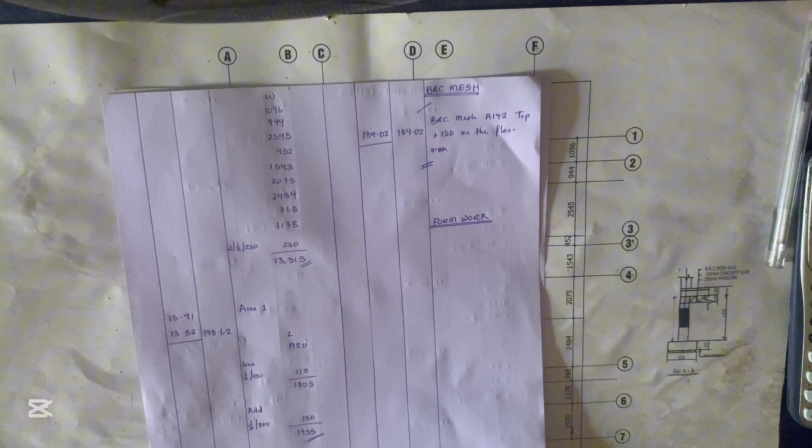In today's video, we're going to be treating how to measure for the formwork and the oversight concrete to this particular drawing for our frame structure. So first things first, how do we measure for our formwork?

Now, I have explained this before that formwork based on the standard method of measurement can be measured in two ways, either in linear meters or in square meters. It is measured in linear meters if the width of the formwork is less than 300 mm, and it is measured in meters square if the width of the formwork is greater than 300 mm. I don't know if that makes sense. So now, we measure it in linear meters because look at it in this situation.

Now, I want to ask you a question. When you are constructing the formwork for your oversight concrete, what kind of formwork or what kind of material do they use? Do they use marine board or plank? They use plank.

Now, the reason why we measure the formwork for oversight concrete in linear meters is because of procurement. When you want to go and get your plank for the construction of the oversight concrete, you will notice that they buy the plank per length. I don't know if that makes sense. The plank is bought per length.

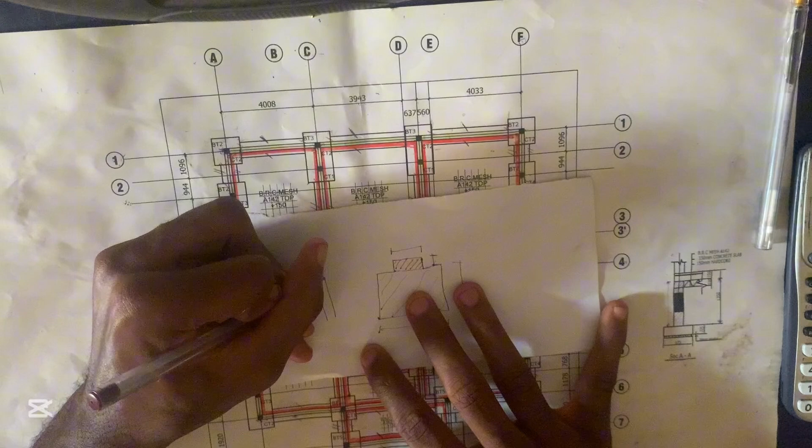So now we deviated too much. Let's go back into our calculation. In order to calculate for our formwork, what do we do? The formwork is going to be nailed at the external side of the block. For example, if this is a section of our block work, the formwork is going to be laid like this. This shaded portion here is our formwork, and it's going to go round the building.

So the same thing applies here. The formwork is going to be laid at the external side of the block work. I don't know if that makes sense. So it means that the formwork is going to be laid like this externally.

And back. So that's how the formwork is going to be laid. So what we're going to be doing now is getting the individual length of this irregular shape. We're going to be finding the out-to-out dimension for this length. We'll measure the out-to-out dimension for this length, multiply it by 2 because here and here are the same. We're going to get the out-to-out dimension for this length, out-to-out dimension for this length,

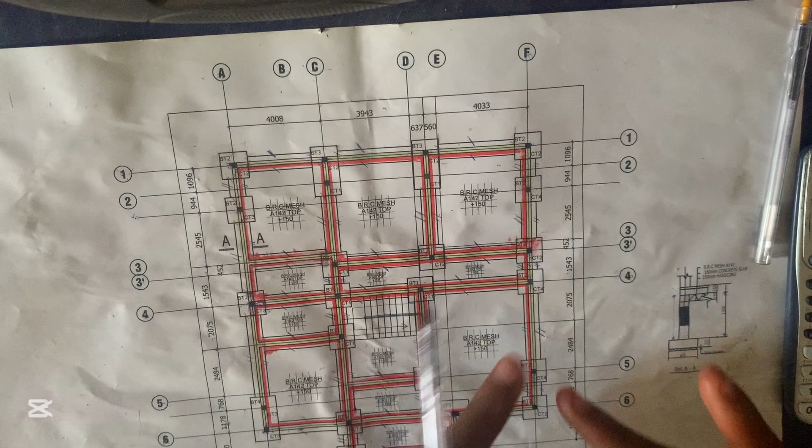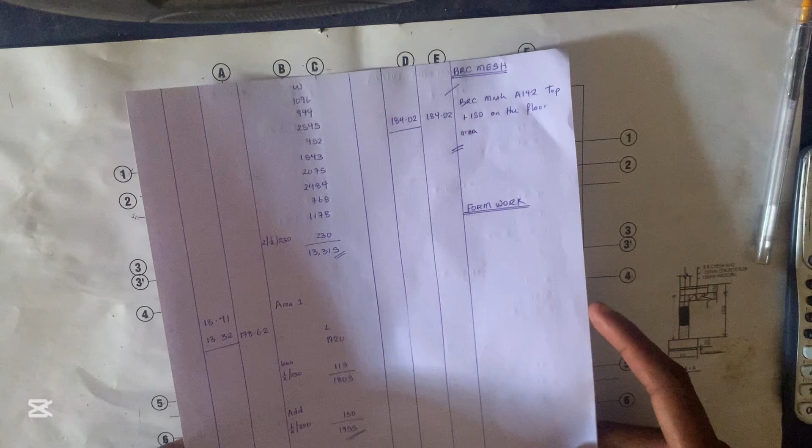and out-to-out dimension for this side. That will give us the total length or the total perimeter of formwork for this building. I don't know if that makes sense. So with that, we'll now begin our calculations. We're not going to do any rigorous calculation here because we've already done most of the calculations when we were dealing with our damp-proof membrane.

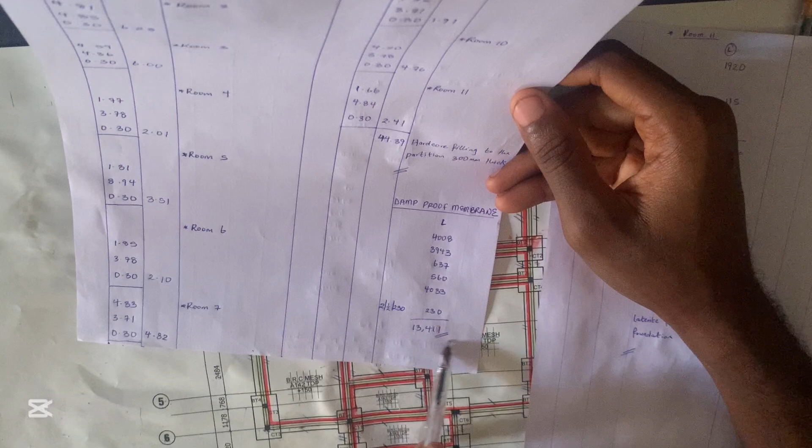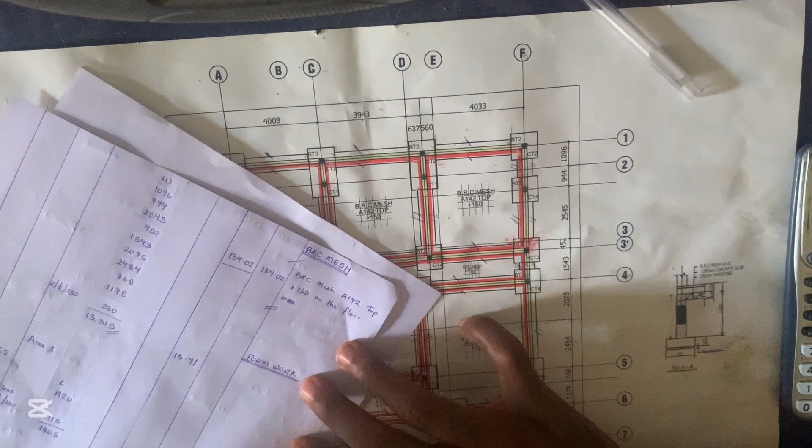So now, if you look at this, we got the total length for this side here as 13,411, as you can see here. We've already calculated it when we calculated for our damp-proof membrane. So all we're going to be doing now is bringing this length back, because this 13,411 is the out-to-out dimension from this point here down towards this point. So the first side will be this long side here, which is 13.41, and then we'll close.

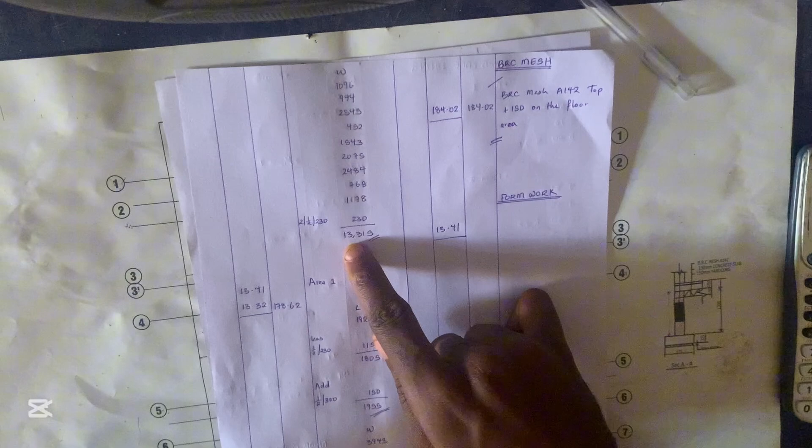So the next part will be this side and this side. For the width side, we've already calculated it as 13,315. So we're going to be bringing it back, meaning that from this edge down to this edge is 13,315. So we'll just record it: 13.32, and then we'll close, and then we'll multiply it by 2.

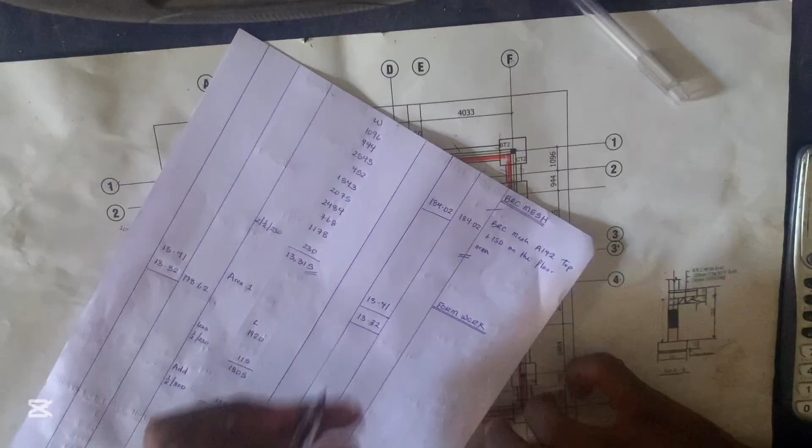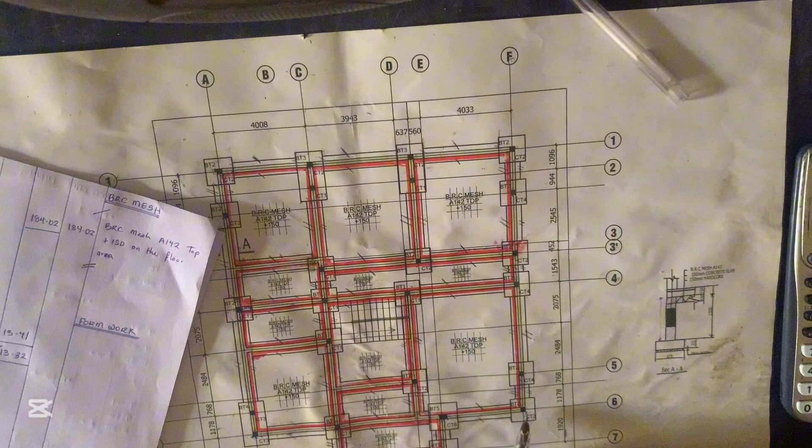We're multiplying it by 2 because here and here will be the same. I don't know if that makes sense. What we have here is the same thing as what we have here, right? So now we're not going to be looking for this side and this side. We're going to be looking for this side to this side, and this side to this side. So the next side we're going to be looking for now will be from this edge down towards this edge.

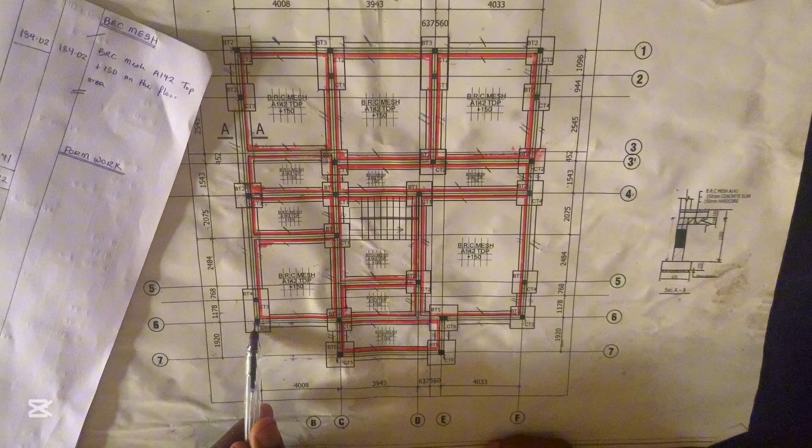But if you look at this, we've been given our center to center dimension from callout A down to callout C. So what we're going to be doing now is subtracting half the thickness of this blockwork to get to this edge, and then adding half the thickness of this blockwork to get to this edge. I don't know if that makes sense. So 4,008 minus half of 230, and we'll add half of 230 to this side.

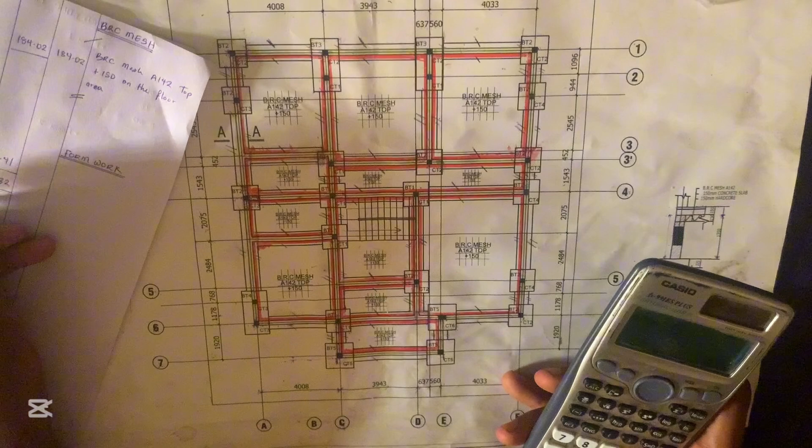So 4,008 minus half of 230 becomes 3,893. So it means that from this edge down towards this edge is 3,893. Then we add half of 230, which is 115, and we have 4,008. So it means that from this edge down to this edge is 4,008. So we're going to be booking 4.01, and then we'll close.

Similarly, we're going to be doing the same thing for this side, using the same approach. Since from callout E to F is 4,033, we're going to be subtracting half the thickness of this blockwork to get to the edge of the blockwork, and then adding half the thickness of this blockwork to get to this other edge.

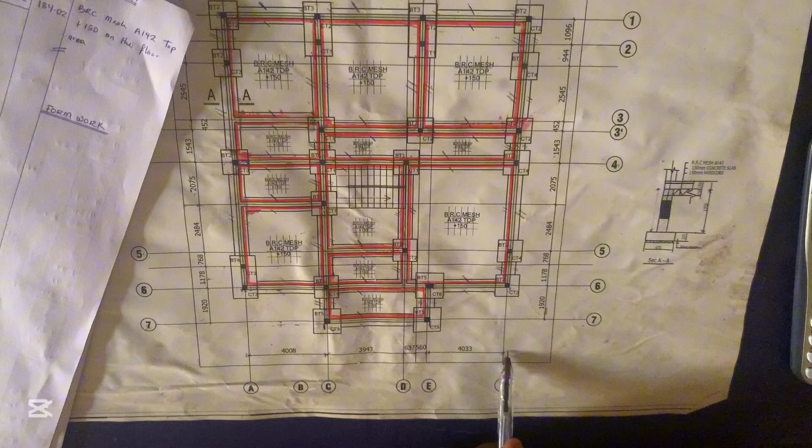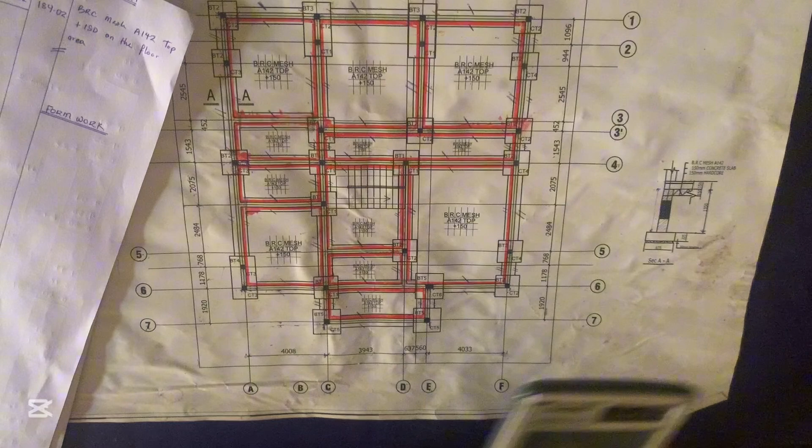So 4,033 minus half of 230, which is 115, is equal to 3,918. So it means that from this edge down towards callout F is 3,918. Then I'm adding half the thickness of this blockwork, which is 115, and I'm having 4,033, which is 4.03, and then we'll close.

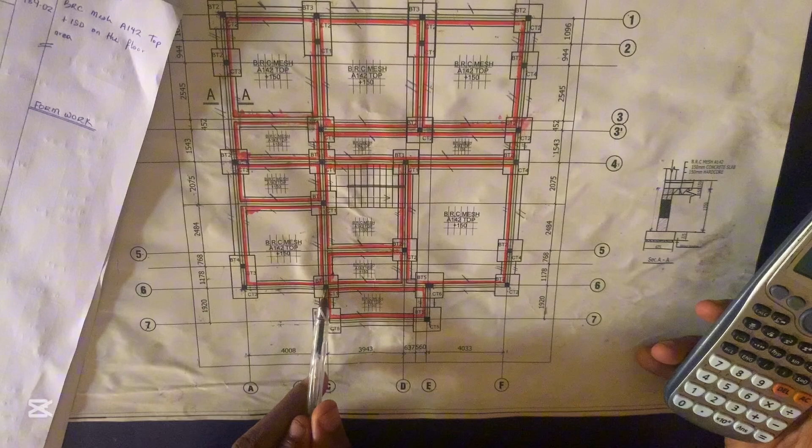So we have gotten this side and we have gotten this side. So the last thing we're going to be getting now is this long side here. And we've already measured that when we were doing our DPM. And as you can see, we've calculated it as

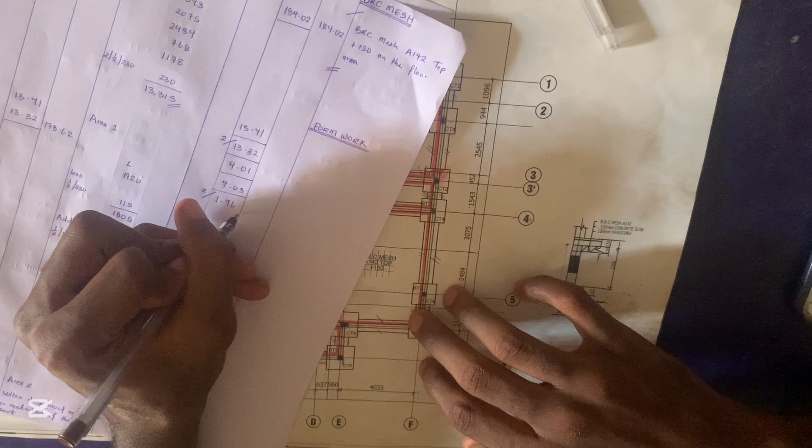1.955. So it means that this side here is 1.955 and this side here is 1.955. So we'll be multiplying it by what? 2. So we'll now measure 1.96 multiplied by what? 2, and then we'll now close. So what we're going to be doing now is bringing this out to our squaring column, and then we'll add everything together to get the total length of our formwork.

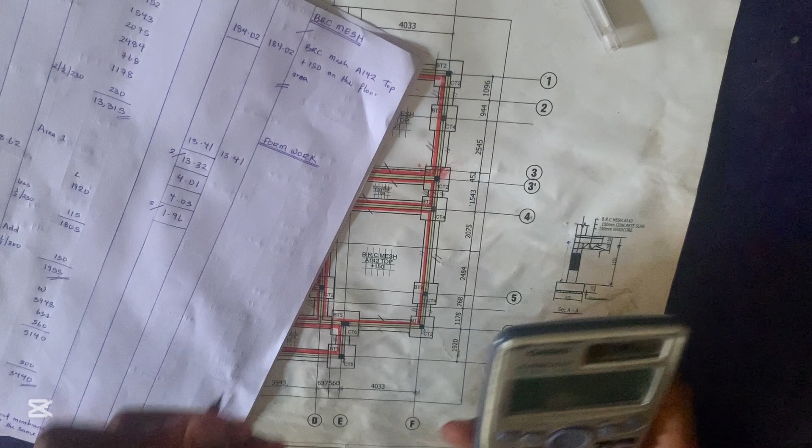So the first one is what? 13.41. We'll bring it out. 13.41. The second one is what? 13.32 multiplied by 2, and that is equal to what? 26.64. The next one is what? 4.01. The next one is what? 4.03. The next one is 1.96 multiplied by what? 2, and that is equal to what? 3.92.

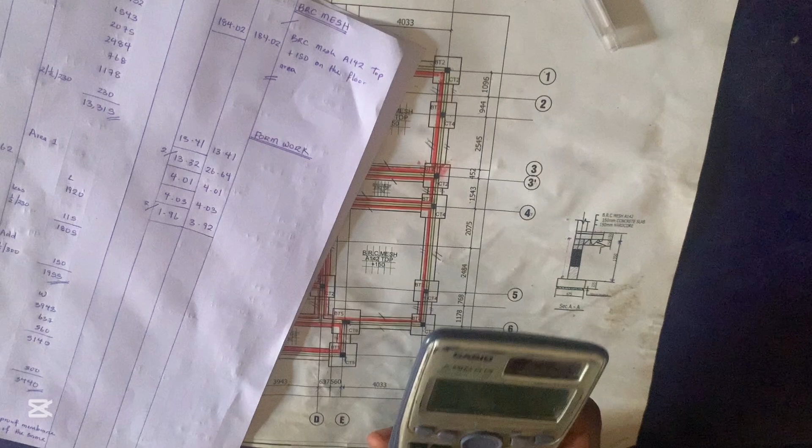So you add everything together. 13.41 plus 26.64 plus 4.01 plus 4.03 plus 3.92, and that is equal to what? 52.01. So 52.01 is the total length of the formwork we're going to be needing to cast our oversight concrete.

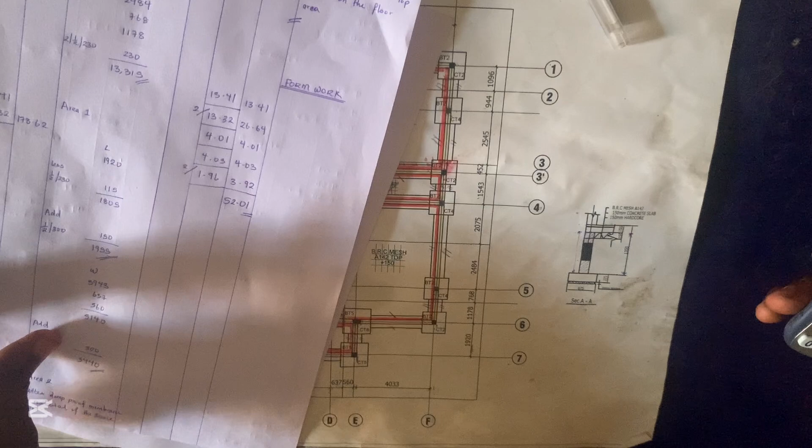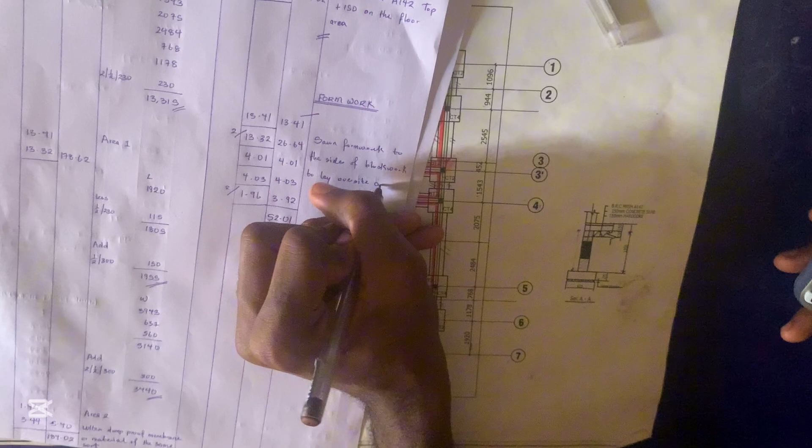So we're now going to book sawn formwork to the sides of blockwork to lay oversight concrete, and then we'll close. Doing this, we've measured for our formwork.

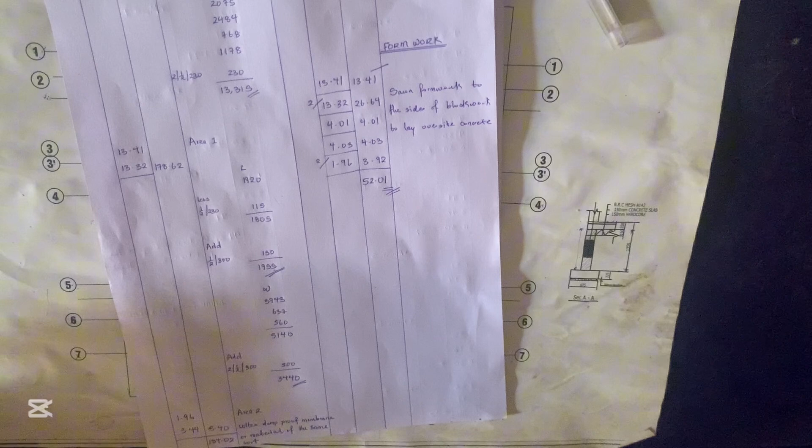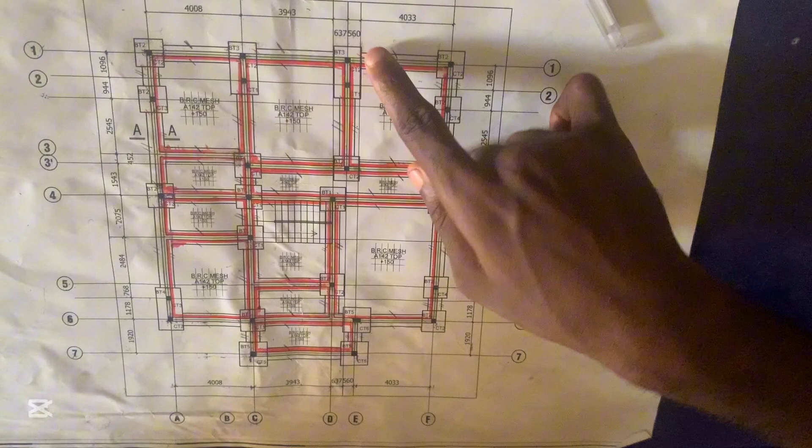So the next item and the last item for measurement of the substructural work for a frame structure would be the oversight concrete. And at this point, we're not going to be doing any serious calculation because we've already calculated for the area of our oversight concrete, because the same area that we laid our DPM and our BRC mesh is the same area that we're going to be laying our concrete for the oversight concrete.

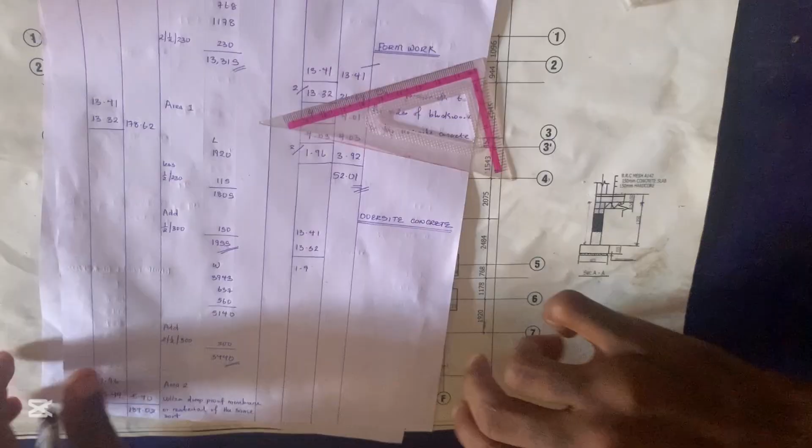So what you just go and do now is to get the area that you've already calculated for in your DPM, and you bring it back. And as you can see, we calculated 184.02 as the total area of this irregular shape here. So what we're going to be doing now is bringing this back. So our oversight concrete, we're now going to measure. So for our area 1, you can see we had 13.41 by 13.32.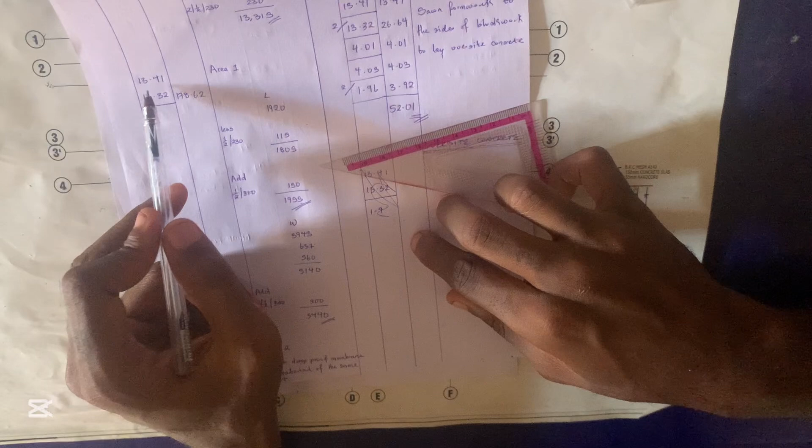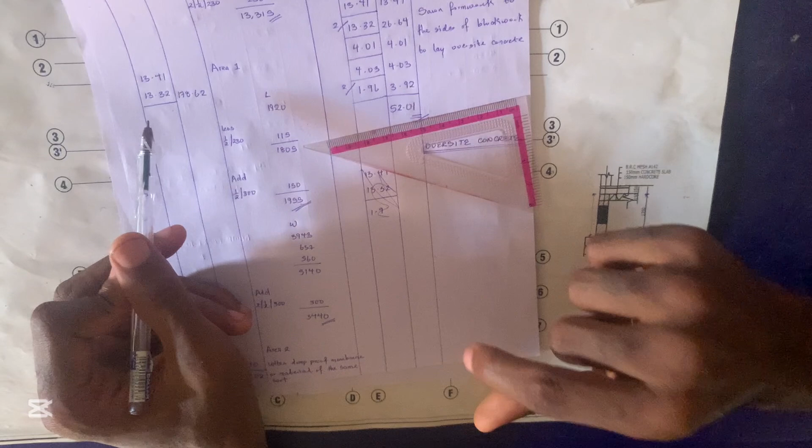So for our area 1, we had 13.41 by 13.32. But remember, oversite concrete is measured in what? Meter cube. So one parameter is missing here, which is our thickness. And the thickness of our oversite concrete is what? 150 mm. So we're going to be adding one more parameter to this. So for our area 1, we'll bring it back.

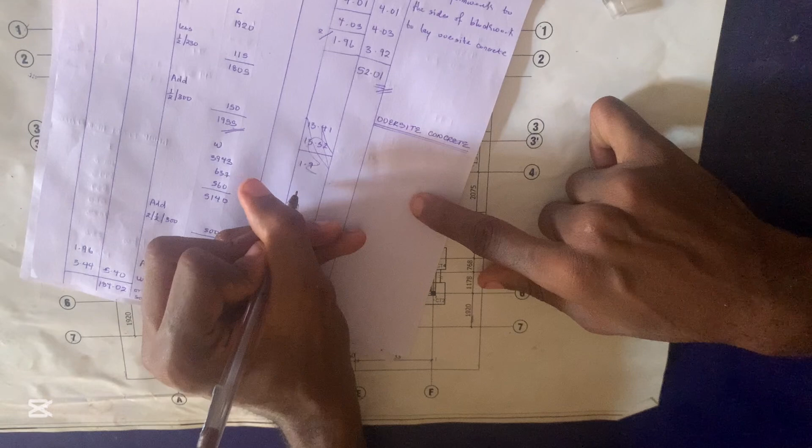13.41 by 13.32 by 0.15, and then we'll now close. So the next will be area 2. 1.96 by 3.44 by 0.15, and then we'll now close.

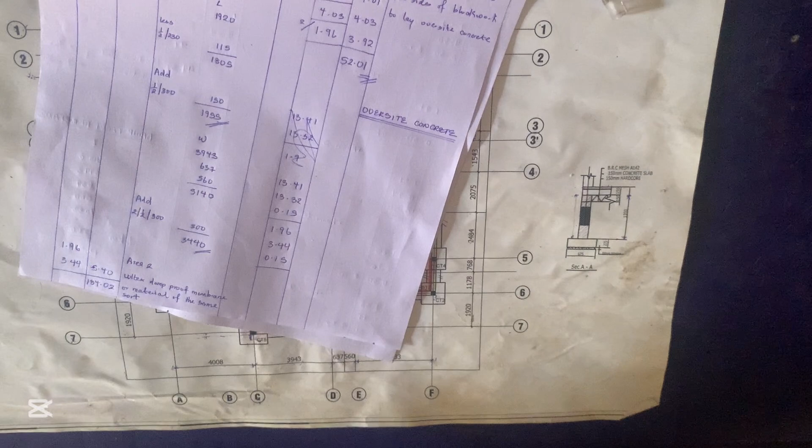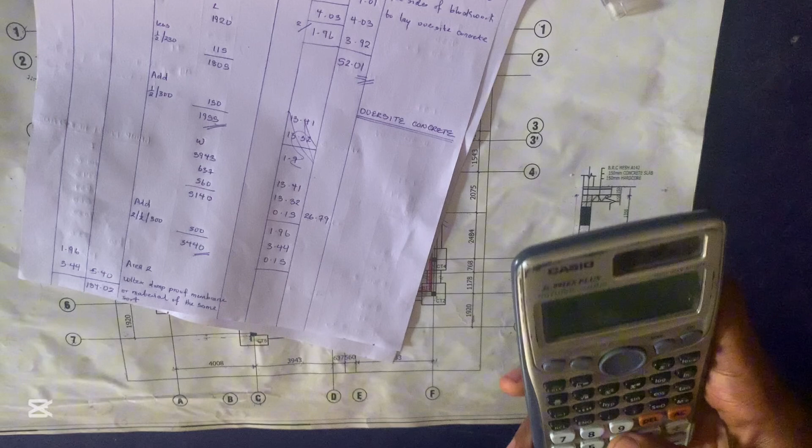So 13.41 times 13.32 times 0.15 is equal to what? 26.79. And then the last one is 1.96 times 3.44 times 0.15 is equal to what? 1.01. So we'll add these two parameters together to get the total volume of our oversite concrete.

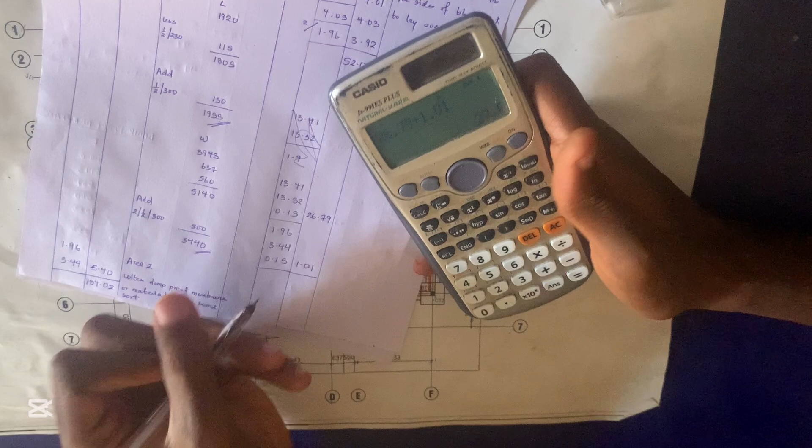So 26.79 plus 1.01 is equal to 27.8. So 27.8 is the total volume of the oversite concrete for this drawing.

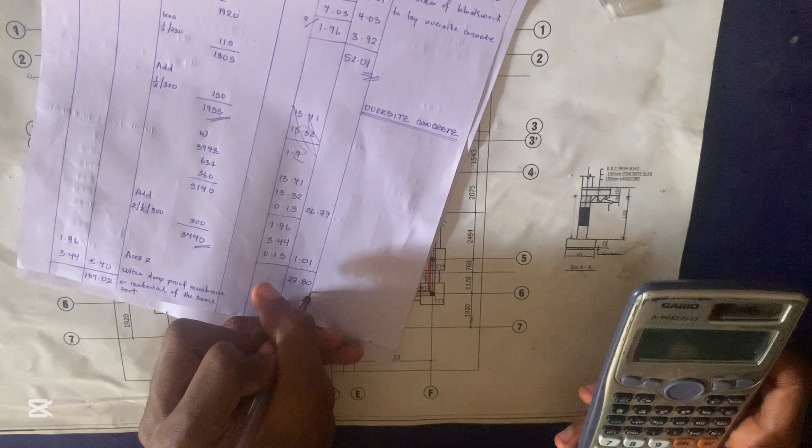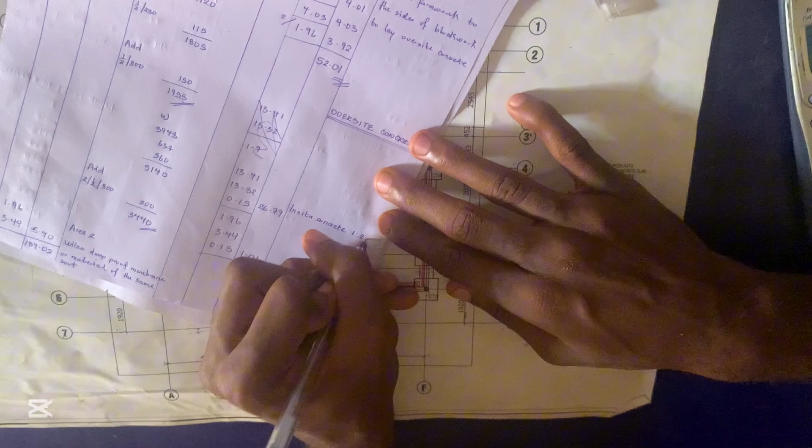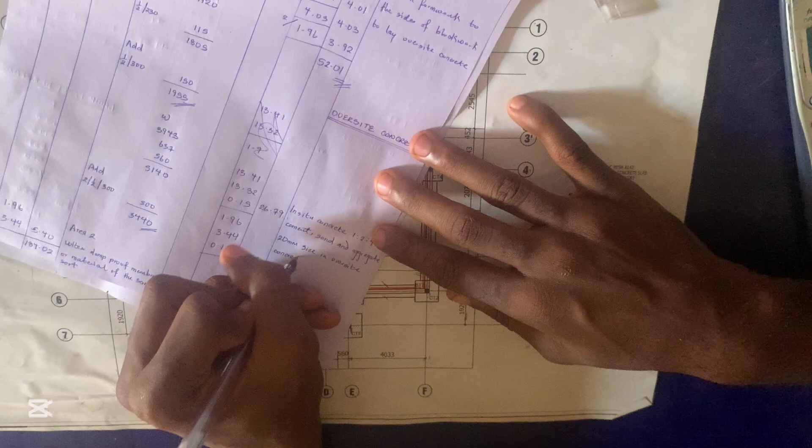So we're going to describe in situ concrete work. Then you put the concrete mix 1:2:4, cement, sand, and aggregates. Let's say 20 mm size in oversite concrete. And then we'll close. So doing this, we've measured for our oversite concrete.

And with this, we've come to the end of the series for measurement of our substructural works for a framed structure. So in the next video, we're going to be kickstarting our measurement for the superstructural works for our framed structure.